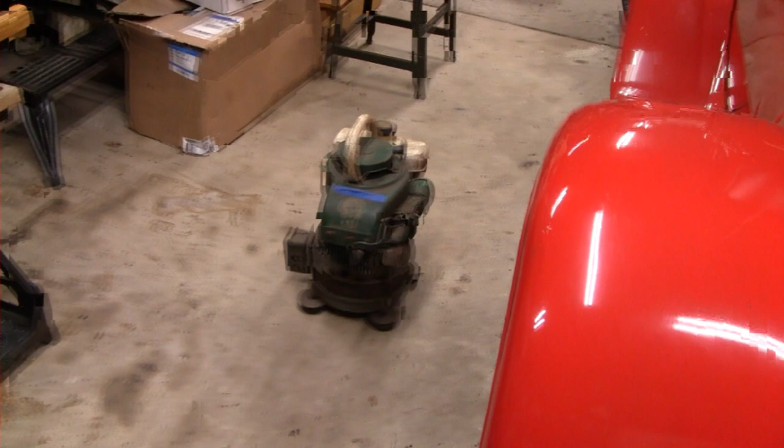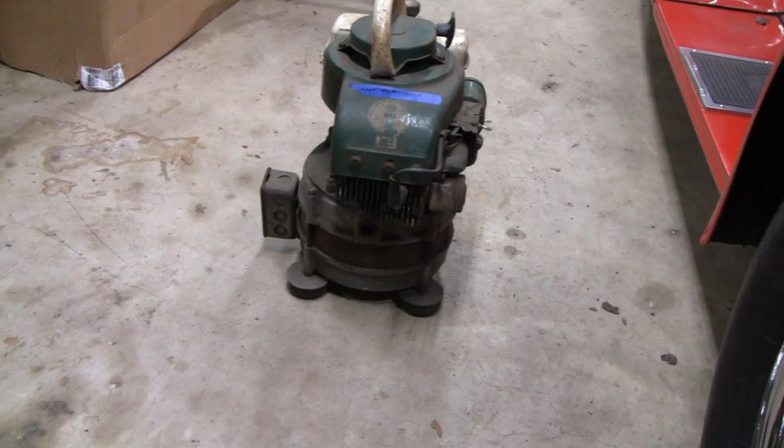Alright, here's our next project. It's something I just picked up at our last show. It's something unique looking, and that's why I liked it. It almost looks like one of the old Apollo lunar modules. You see it's got little feet on the bottom and stuff. And it's a Tecumseh. Doesn't look to be too old. Usually it's not the stuff I work on, I usually work on the 50s stuff. This here, I didn't take any numbers off it yet, or even look at it, but it sort of looks like a vacuum cleaner.

I would say it's probably 80s, 90s maybe, that's what I would consider new. And it's all there. It looks like a vacuum cleaner, but it's actually a generator. I haven't done any research on it yet, other than getting a scale here.

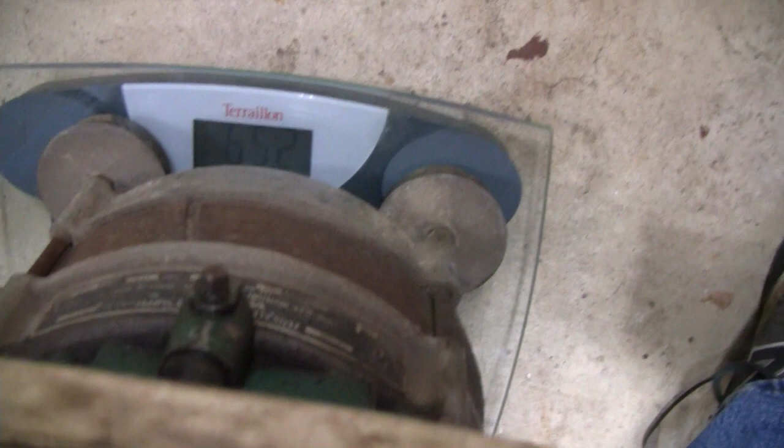Yeah, I don't know much about it, other than it's heavy. I got a scale here. Let me turn it on. We'll see what it weighs. I don't know how well you guys can see that, but you probably just barely see it—65 pounds. So we know it's heavy.

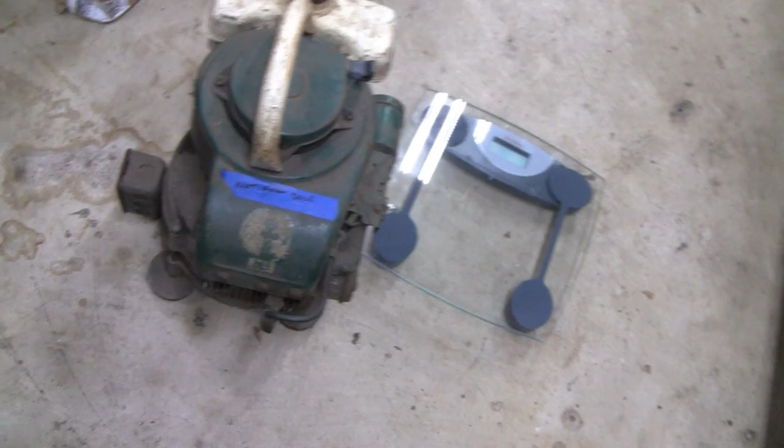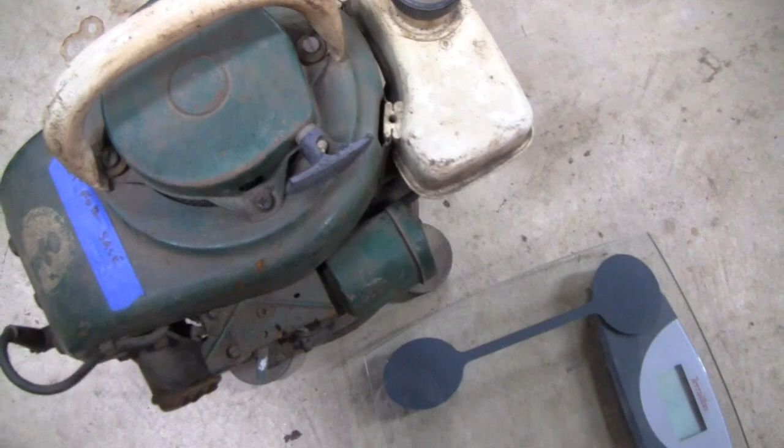Like I say, I haven't taken any numbers off it yet, and it looks to be in pretty good shape. I mean, it is stuck—something's holding it from starting. I don't know if it's in the housing, or the engine seized, or it's actually the generator down there.

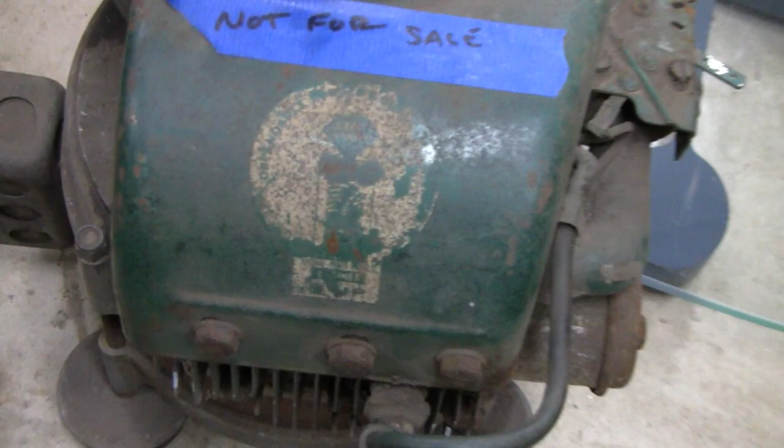So we'll put it on a table and get some numbers off it. Here's what's left of the sticker. Like I say, it's a Tecumseh. That's about all we know about it. From the looks of the shroud, the shape and everything, I think it's probably late 80s, maybe 90s or something. Even the fuel tank's plastic—look at that, it comes right off.

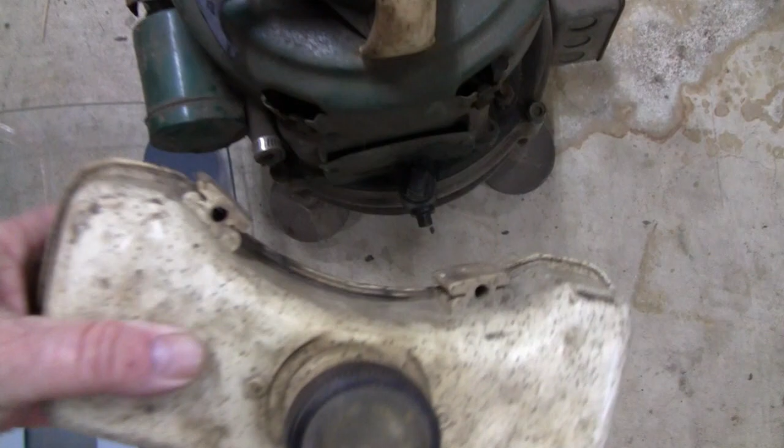So let's put it up on a table and see what else we can learn about it. Alright, let's take a little closer look at it here.

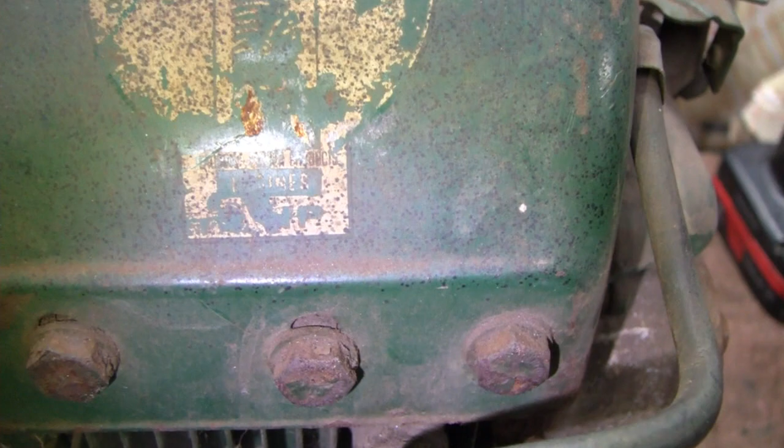Here's the label—well, it is a decal, and I don't know if that helps you or harms you. It does say horsepower there, HP. Come at the side. Let me see, it actually looks better without it. You see that's HP there, but I can't tell what that is. It's a shame, this looks like it was a nice unit.

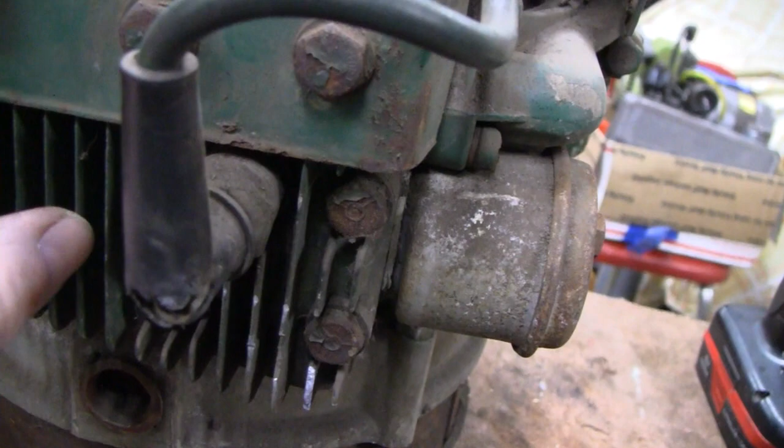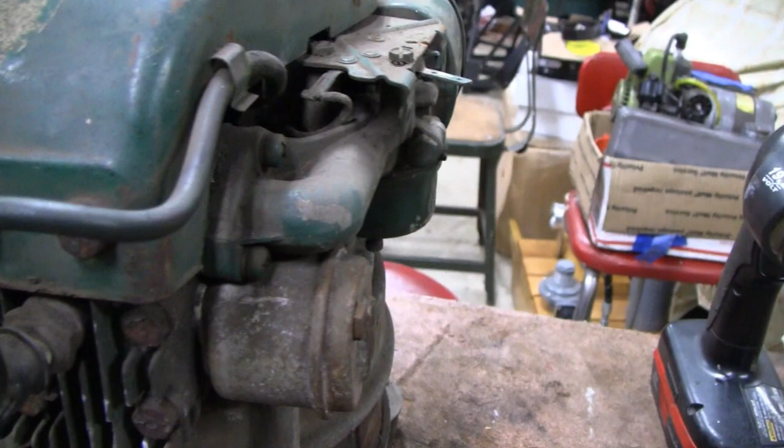It's got a couple broken fins, but they're only chipped on the top, so it's not going to affect the cooling at all. Wow, these cooling fins are really thin. Yeah, that kind of damage is just from the flea bags throwing it in and out of the truck. They really don't care about these things. Same with this spark plug thing—that's all damaged just from rubbing up against everything else in this guy's truck or whatever.

But that's the nature of the game. Even over here, this fuel bowl is all scratched and scraped up, and the air cleaner's slightly bent—not enough to affect anything. But like I say, it's the nature of the game, that's what happens when you buy stuff from flea markets. Then people aren't collectors, they just probably pick this up for nothing and try to make a few bucks on it.

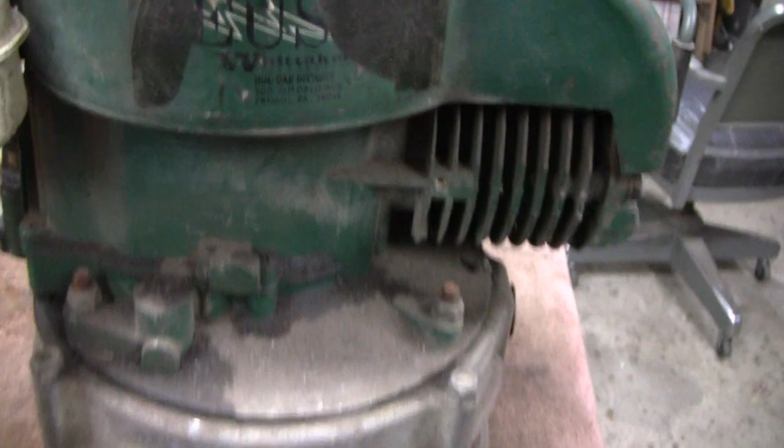Now let's see what it says here on the side. Zeus—you can make out the Zeus and Whitaker Corporation, Hall Dash Guard Division, Primos, Pennsylvania. So it's relatively local.

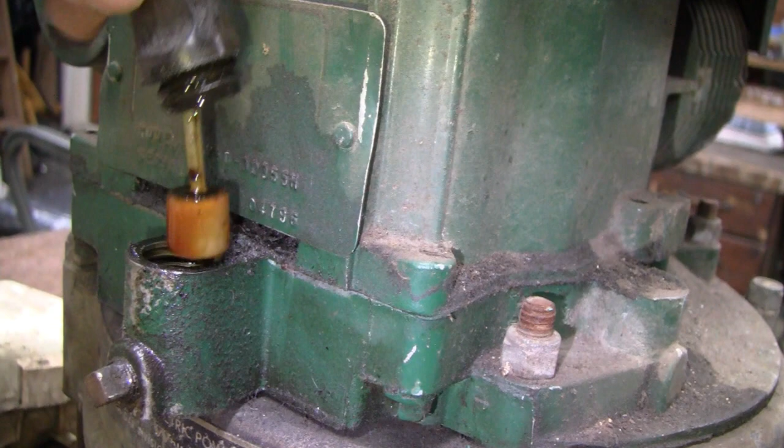Alright, take the gas tank off. Like I said, the gas tank isn't even hooked up. There we go—oh look, here's a plate. I was gonna look at these numbers down here, but there's a plate here, and here's the filler. It's loose, huh, that's pretty cool. It's clear and it looks like it's a gauge. Sorry, I was looking there.

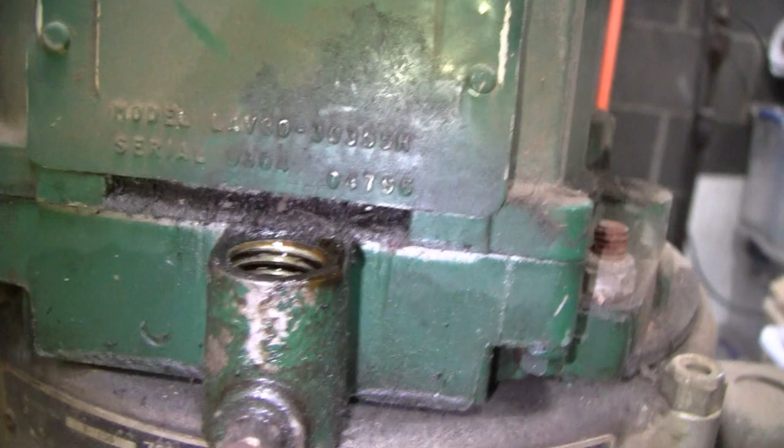Yeah, look at that, I'll clean it up and we'll look at it later. That's an oil level gauge—I've never seen that. Okay, I just did that to look at the numbers here. Alright, let me turn this light off because it's a little harsh.

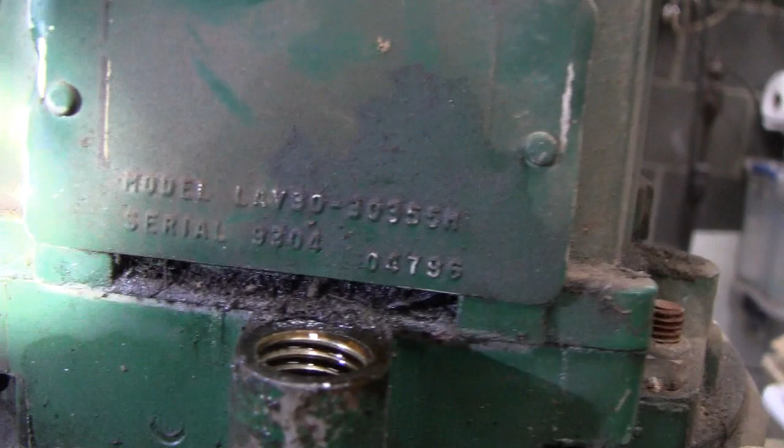If I need a light, maybe I'll go with this one, which is even harsher. But I'm not familiar with these numbers - I'm a Briggs guy.

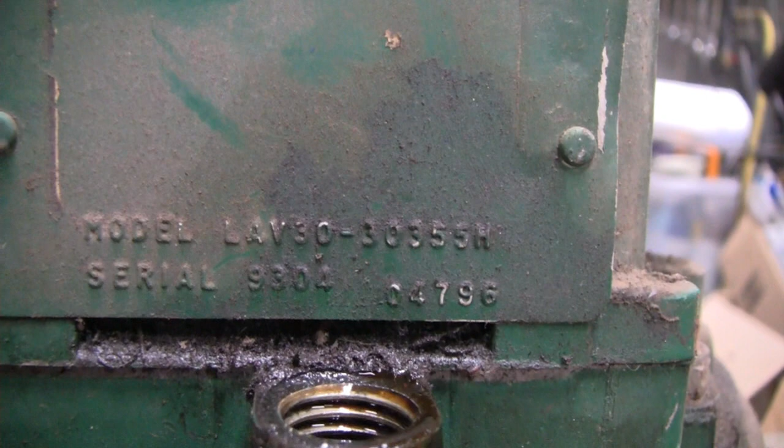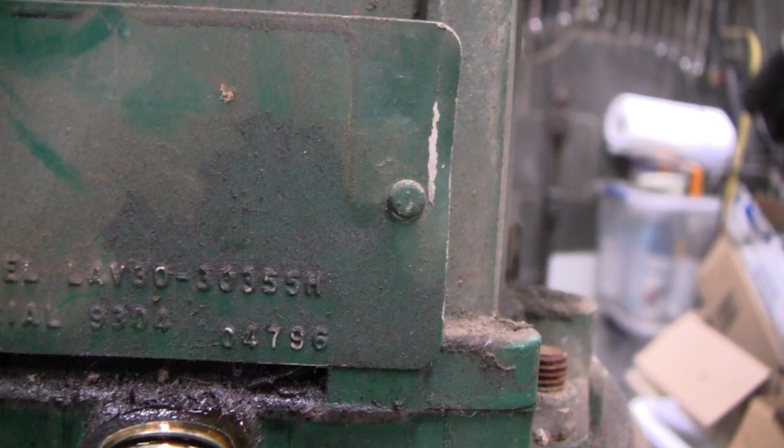Up until maybe 10 years ago, Tecumseh didn't even have numbers on a thing. It says model LAV - I'd imagine the V stands for vertical, and the 30 means 3 horsepower since it's not a very big engine. Then you've got 303 55H - I don't know what that means.

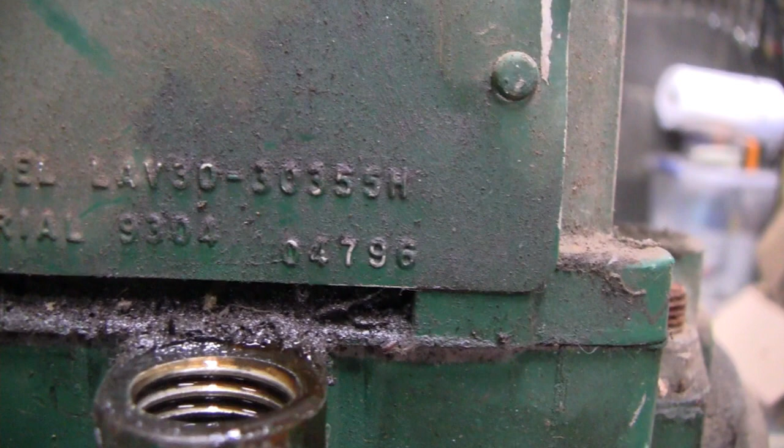The serial number here says 9304, which could mean it's a 93 in the 4th month, but this other number looks like it might be a date - 04796 - so that could be April, and maybe that's April 7th, 1996. I'll research it - I should be able to find something, but I'm not a Tecumseh guy, so I don't know what they are. By the time you guys tell me, we're gonna know about it.

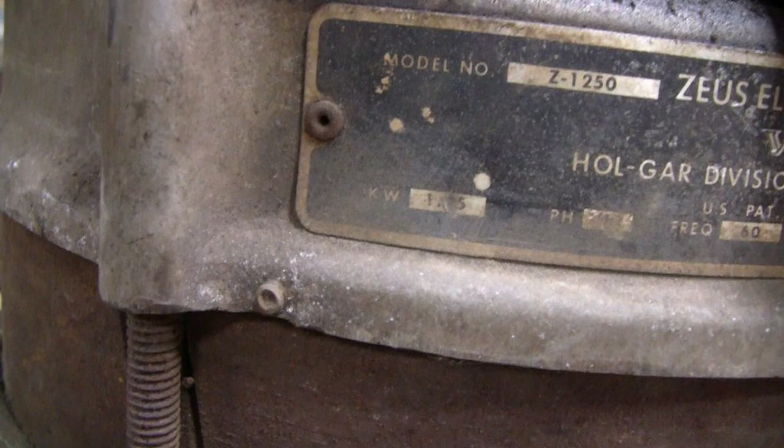Here's the specs for the generator - let me see if I can zoom in on it. It's single phase, and for the kilowatts - that always happens - it's got a dent right where the number is. I can't guess. Maybe 1.5, I don't know.

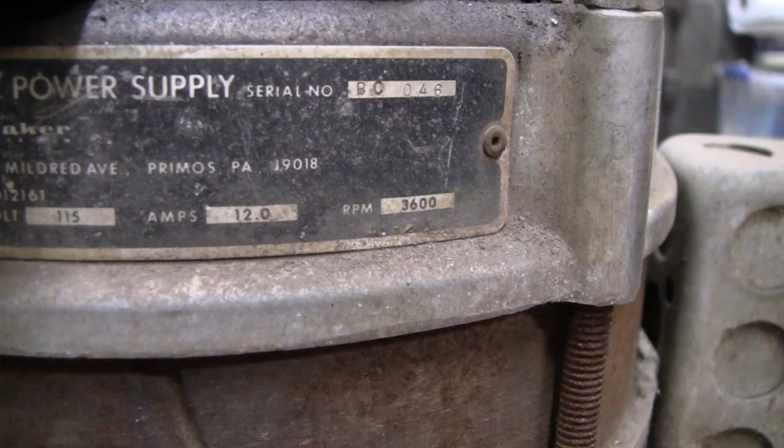Mike would know just by looking at it. Frequency, 60 volts, 115, 12 amps, and 3600 RPM. So it's a screamer - it's just meant to take out in the field and run tools, I guess.

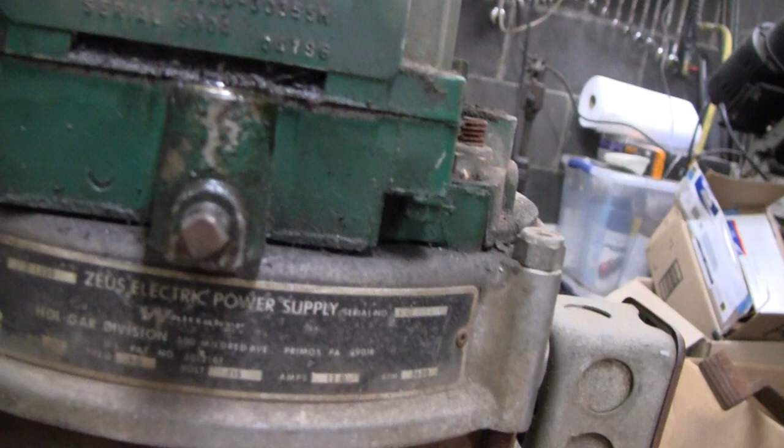But it is interesting - let me clean this whole thing up and we'll take a better look. Alright, I cleaned this oil filler up, and I guess this is before they came up with automatic shutoffs, you know, low oil shutdown. But that's pretty good - this way somebody could look at it and tell.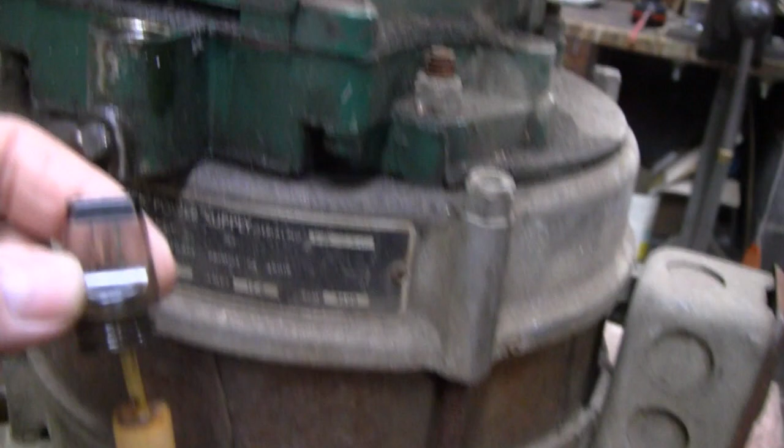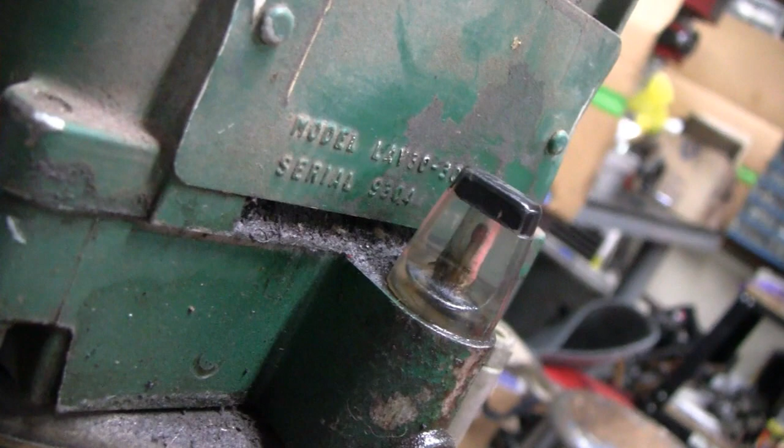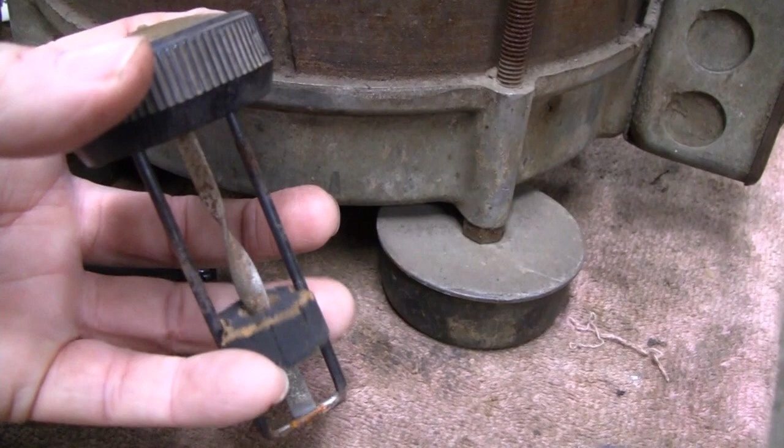Then we've got the gas cap here - pretty cool too, it's got a gas gauge in it. It's kind of cloudy, and I'm sure you can't see it, but this is a cork on a twisty little thing, and the twisty thing is actually the needle. If you look real close, you can see it moving. If you put the cork all the way down, it's on the E, and when you slide it up, it goes to the F. That's pretty good - that's pretty clever.

Alright, I think I'm going to go research these numbers a little bit. I was looking at them, and that serial number, 04796, I said that might have been January, February, April 7th, '96, but you don't know what order Tecumseh uses for those numbers - that might mean April '79, the 6th day. You never know. Let me go see what I can figure out.

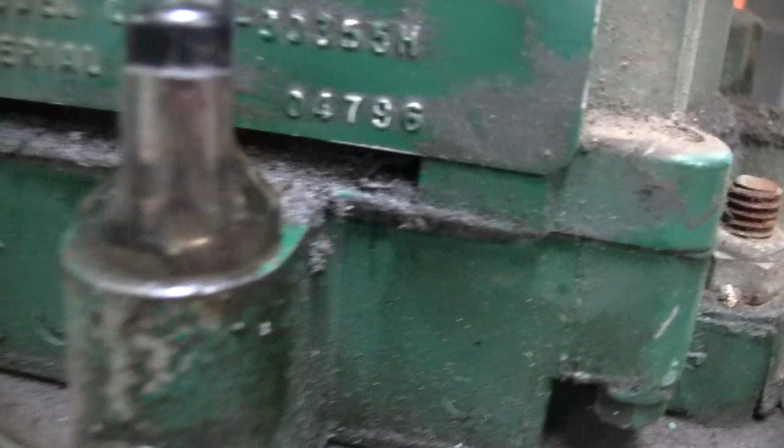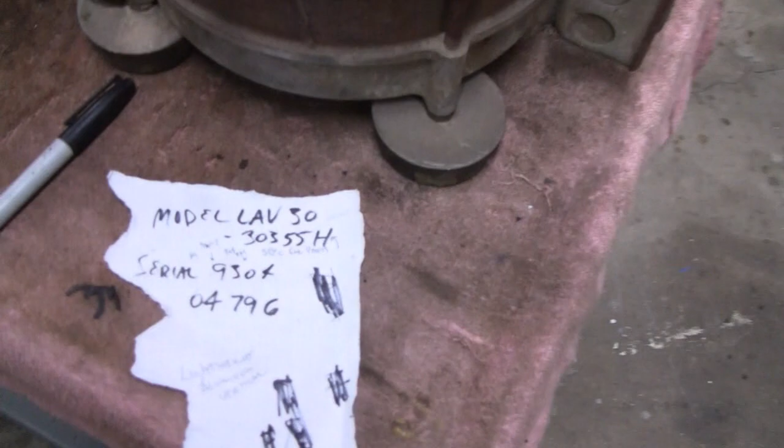I wrote down the info here, so let me check it out and see what I can figure out. Be right back. Alright, we did a little research on these numbers, and we were completely off - well, a little bit on, but mostly off.

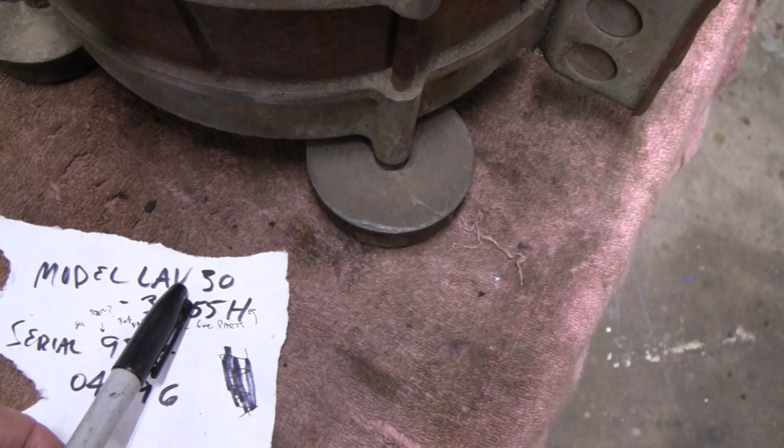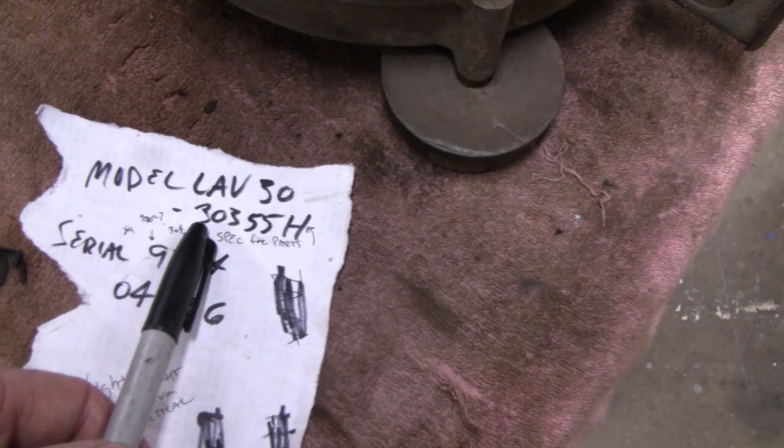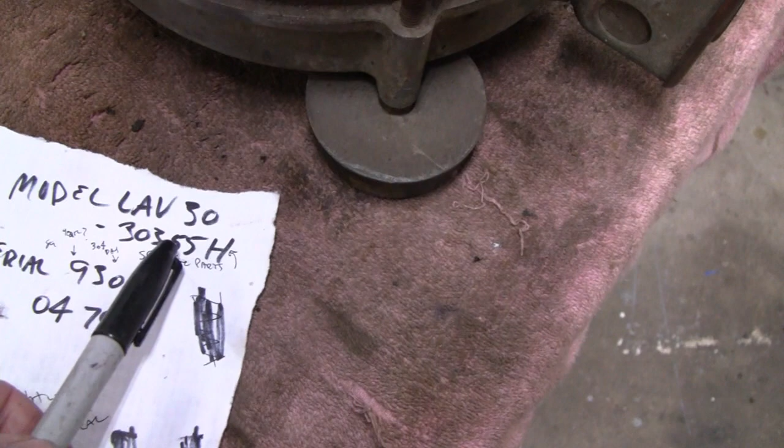But the model, we were right. The V stands for vertical, it stands for lightweight aluminum vertical, and the 30 does stand for 3 horsepower. These numbers down here apparently don't really mean anything unless you're buying parts, and that's like a series of the engine or something like that.

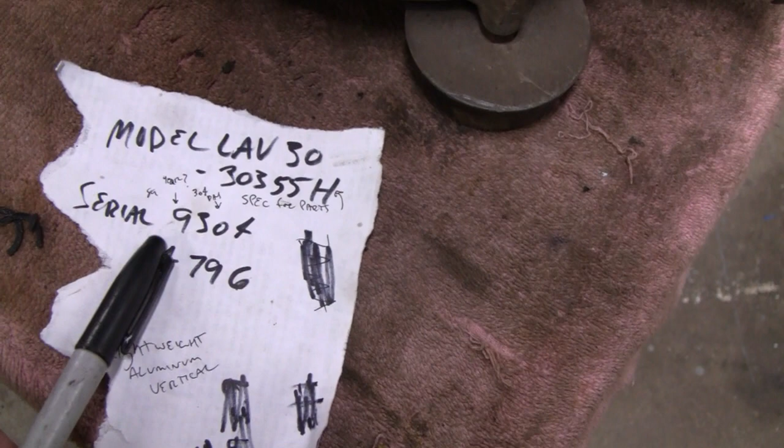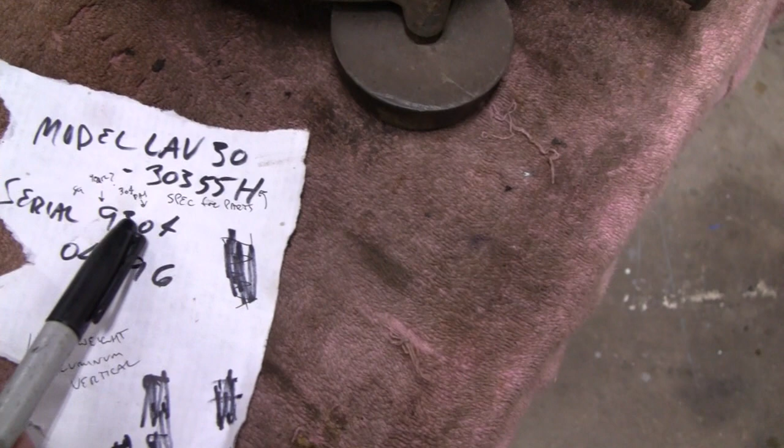That'll decipher what it has inside. But then when you got this serial number here, it got a little bit confusing because of the different years and everything. But from what I can determine, the 9 could mean like 1969, 79, 89, or 99 or something like that. And then after 2000 they went with five numbers. But anyway, the 9, I'm going to assume it's like an 89, 1989.

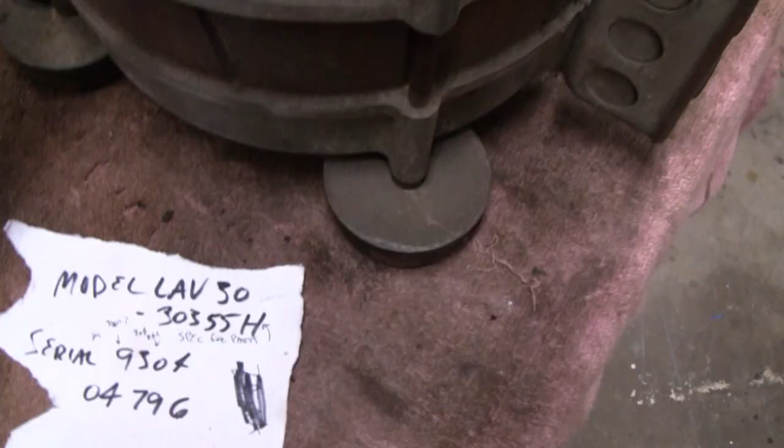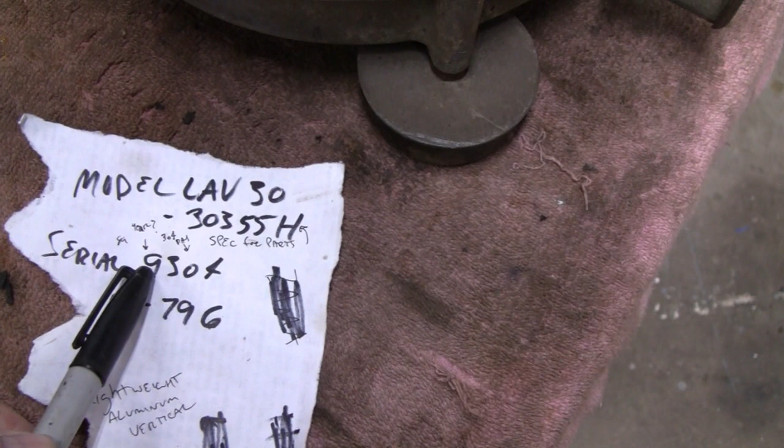Some of you guys, maybe just by looking at it, can tell me they didn't start this type of shroud till a certain year, or this air cleaner, and they didn't use this until such a year. But if anybody knows, let me know. Or if they had one and when they bought it, that would help too. But anyway, yeah, the first number is the year, so I'm going to call it an 89. And then the 304, that's the day it was made.

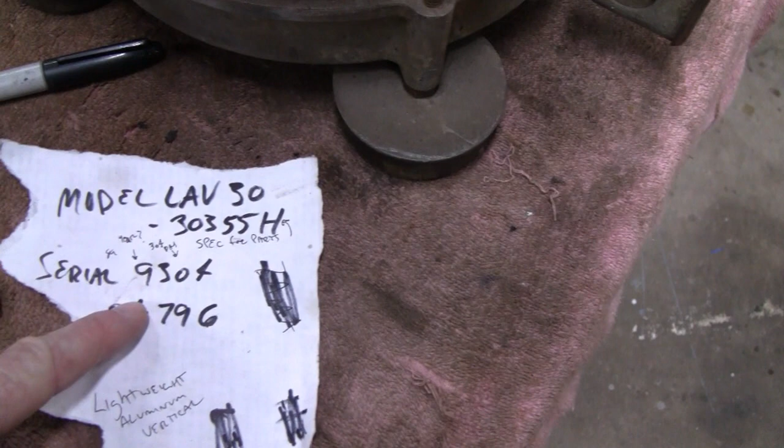That would be the 304th day, which is actually Halloween. So this thing's got a birthday coming up. And then these numbers down here, I still don't have a clue. So if any of you guys can help me with them serial numbers, we'll figure out what year it is. Not that it matters, just out of curiosity.

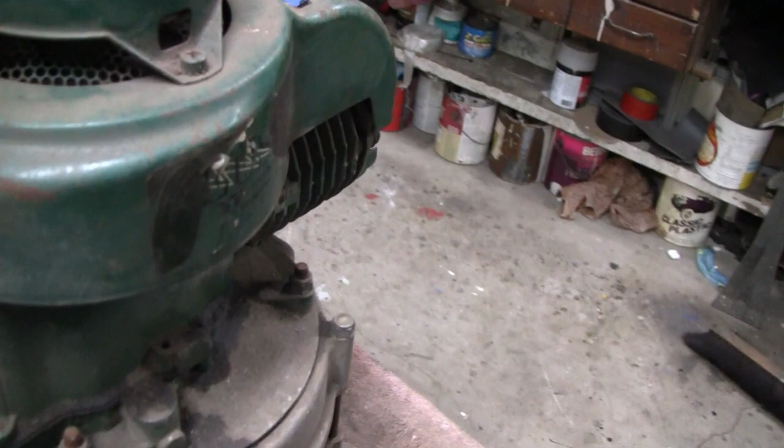Alright, I'm going to start dismantling it. And like I say, if the problem is in the engine, I can fix it. But if it's in the generator, I'm going to leave it to Mike. I mean that's his thing. I'd be a fool to try and mess with that.

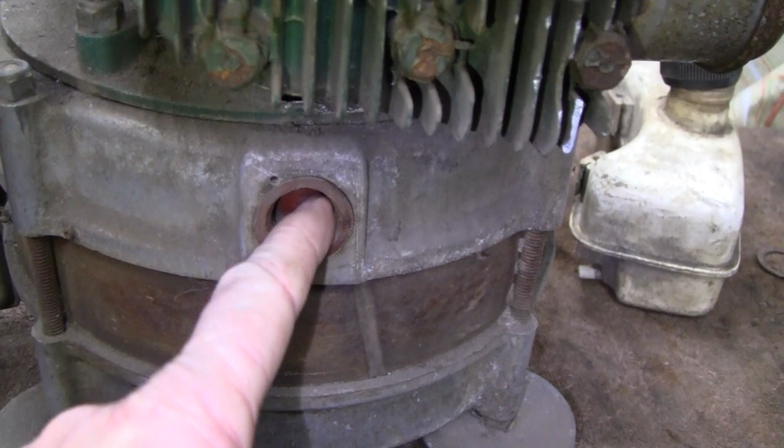And it's got a little plug on the side here too. I don't know what that's for. Or maybe you connect the... I bet you that's what it is. If you want to connect up more wiring, that's probably just a thread, and you send wiring out. I don't know. Like I say, it has a plug on the side here, and that's all I know about it.

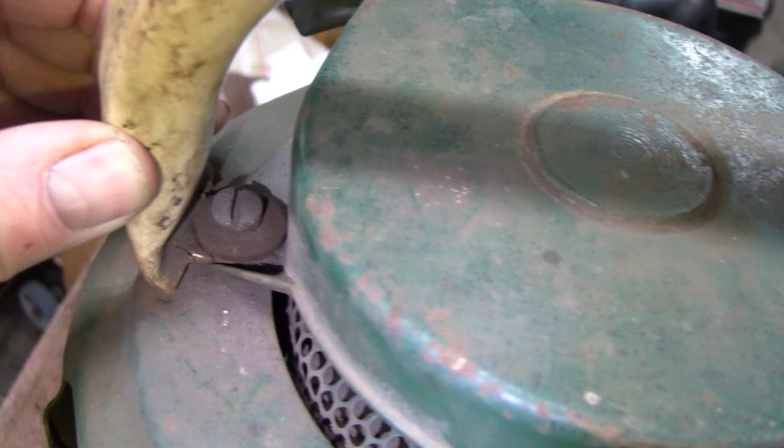But I was looking at this, and this handle here, it looks like it's about to break. Right here, it's loose, and this side here, like I said, the only thing holding it is that washer, I think it might even be broken. But these screws feel a little loose. This side looks okay, but it's odd that they would bolt into a housing there to pick it up. Like I say, 65 pounds.

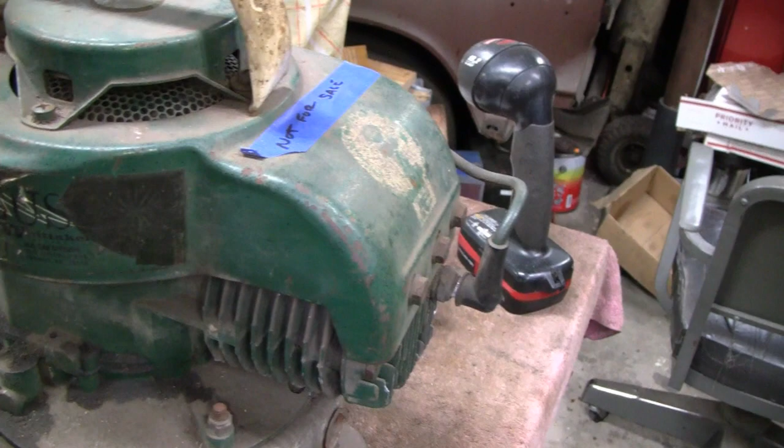So, alright, I think this video is getting a little long. Not too sure, but I guess next video we'll start taking it apart and see what we can figure out. Alrighty, thanks for watching, and enough of this.